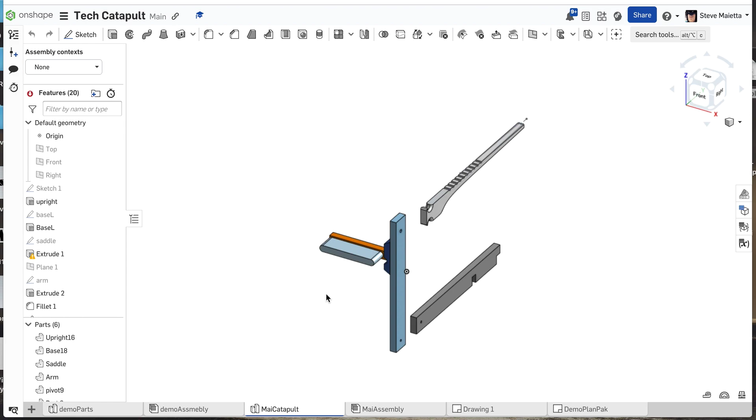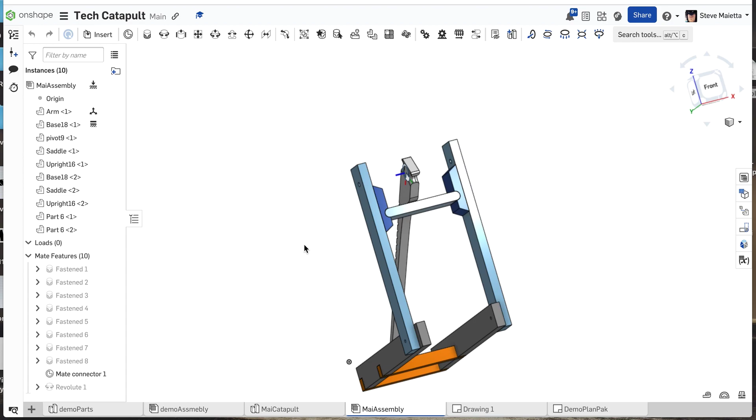Here's my Catapult parts. I've got some interesting looking parts here, but they're all simple parts. I've got my assembly built here, assembled, so I can see that everything fits correctly, and I am quite happy with that. Now I need to create a set of plans so we can build this catapult.

Remember, that happens in what's known as a drawing. So if I click on my drawing, I'm going to show you what I've got here. I've got the first page of my drawings, the assembly: front view, side view, top view, isometric view.

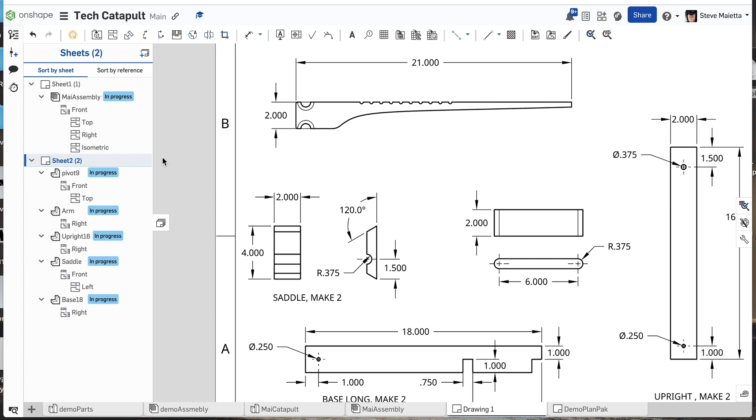I need another sheet to hold the parts, so I'm going to open my sheets menu here, and show you that sheet. That's sheet number 2. Double click, here's the other sheet. This sheet shows you how to make all the separate parts.

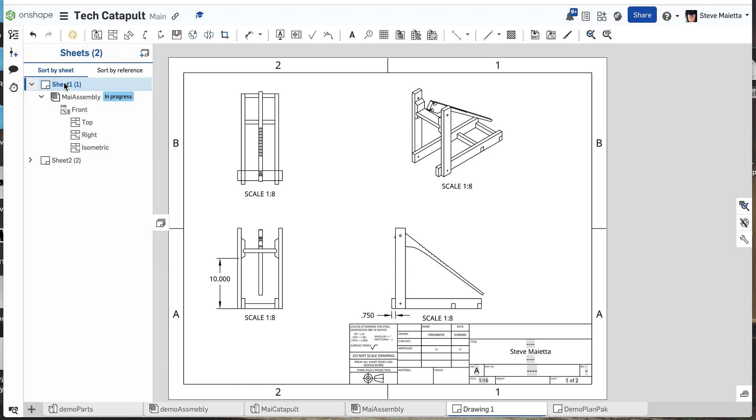Saddle, make 2. Upright, make 2. Dimensions are given here. Base long, make 2, etc. So that's sheet 2, and sheet 1 is my isometric, and it shows how to assemble the parts.

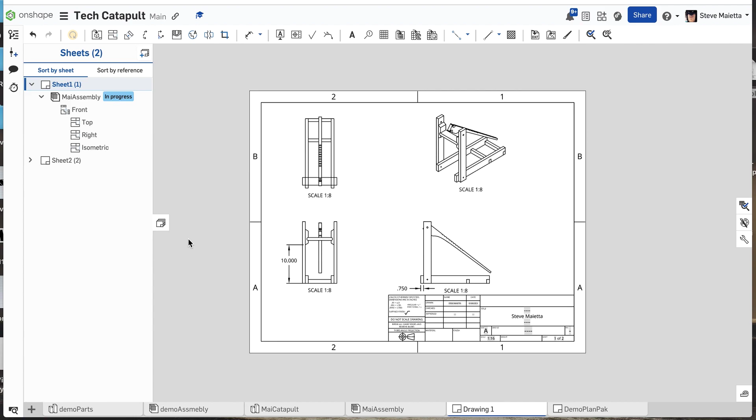This upright is 3/4 of an inch from the front, and these saddle pieces are 10 inches from the base, etc. So let's make a set of drawings like this so we can get it perfect.

All right, plus create drawing. We're going to choose ANSI A, that prints out really well. No views. We're going to start with our first page, which is our assembly view.

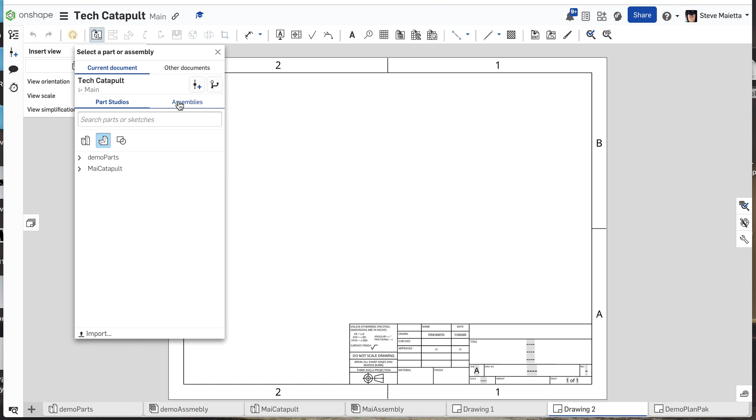We're going to insert the assembly, and then we're going to make all the views appear. OnShape automatically opens up the insert option here. I'm going to go to assemblies, and I'm going to insert my assembly. Now it's sitting here.

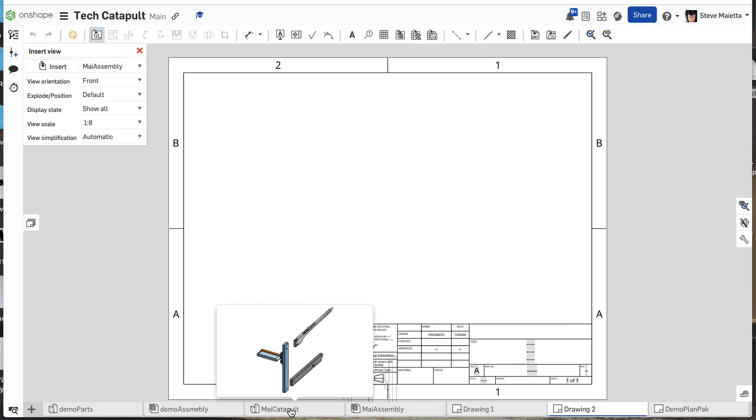I'm not sure if this is the front view or not. It says front. What front here means is, over in your part studio or assembly that you're in the front view. So if you built it on the top, you might have to change it here. At this point, you need to choose the view that gives the user the front view. The end user of your plans will not have all these files.

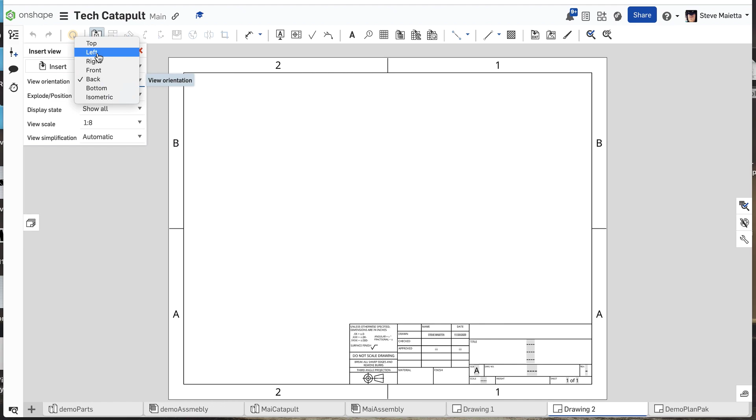I'm pretty sure I did it in a logical way, so front view always goes bottom left. I'm going to click it. Now OnShape automatically switches to the next tool, which allows you to project views onto the side, up to isometric, and over to the top view.

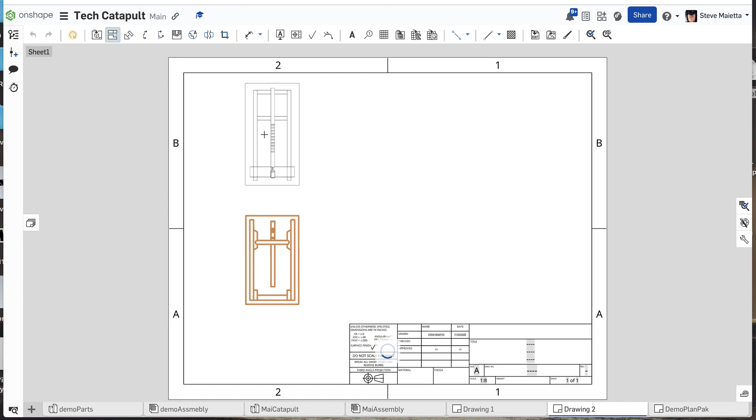Let's drop the top view there, just clicking. I'm going to select my front view again, click it, and paste my side view over here somewhere. Now I'll do the same thing for isometric: click the front view, they should all be based on this front view, and I'll show you why in a second. Click it, and come up to isometric top right.

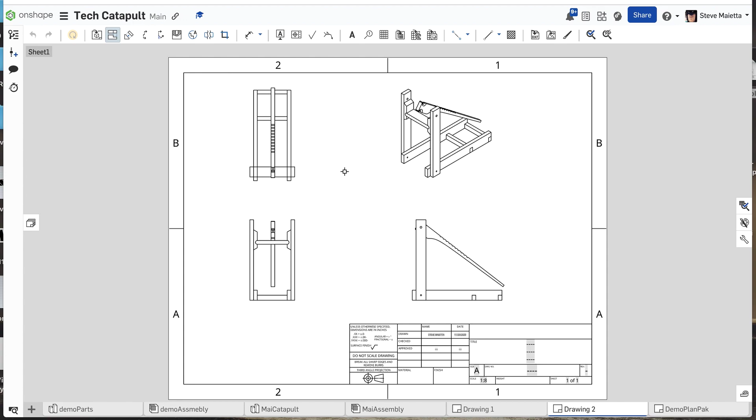Now I'm going to press escape to break off this tool. The reason we should base all our views on the front view is because watch how they stay aligned. When I move the view, they always stay aligned, because aligning the views is very important—it's a standard around the world. So OnShape makes that happen, and we might as well take advantage of its ability to do that.

My views fit well, they're not too big, not cramped, and they're aligned. So that's a good first page, sheet number 1.

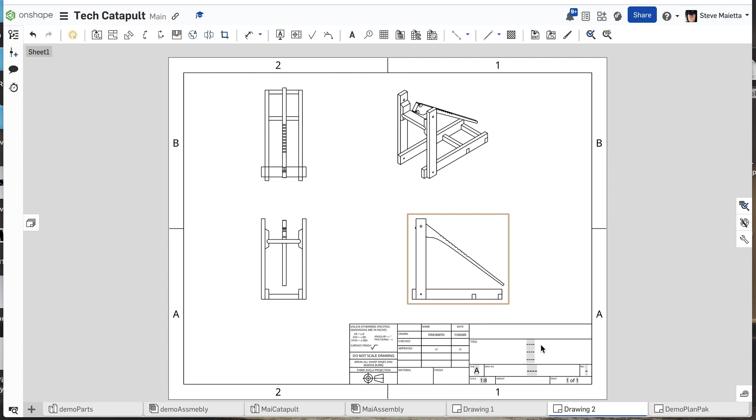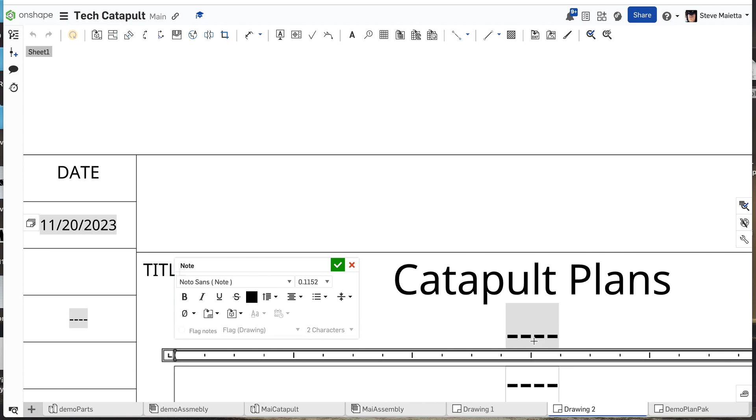In here, I'm going to put my title. Double click on those lines, delete that: Catapult Plans. Next one, middle, we'll put Assembly View, Assembly, and then the bottom one we put our name. Accept that. Now we have our title box filled out.

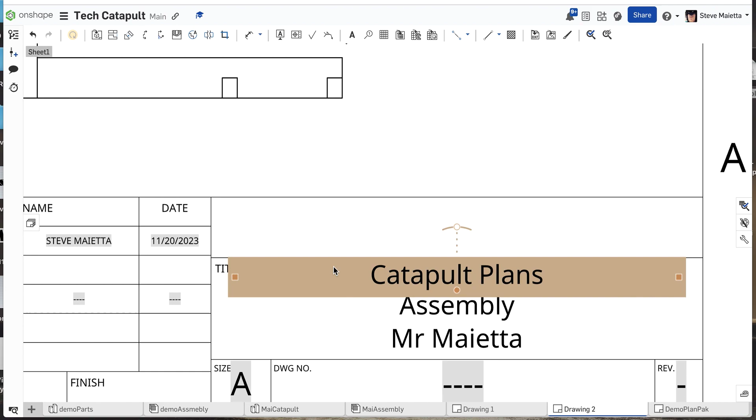So this sheet is almost a good start. We need to add details. Now let's make the next sheet.

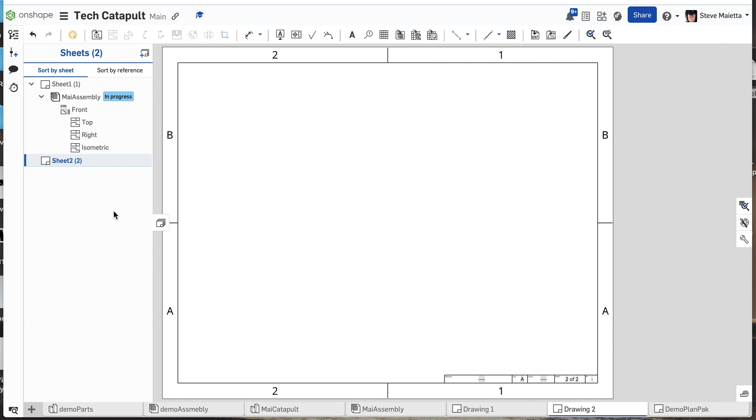Click Sheets, we're going to add another sheet. Notice we're not making another drawing down here, we're adding a sheet to our drawing pack. Now we have a nice open space to add our parts. I'm going to close the menu here and click Insert.

I'm going to go to MaiAssembly, press Insert again. We don't want assemblies anymore, now we want to find the parts. So I'm going to open MaiCatapult, and you're going to see that all the parts are here. Now it's up to you to decide how to organize your parts so they fit nicely.

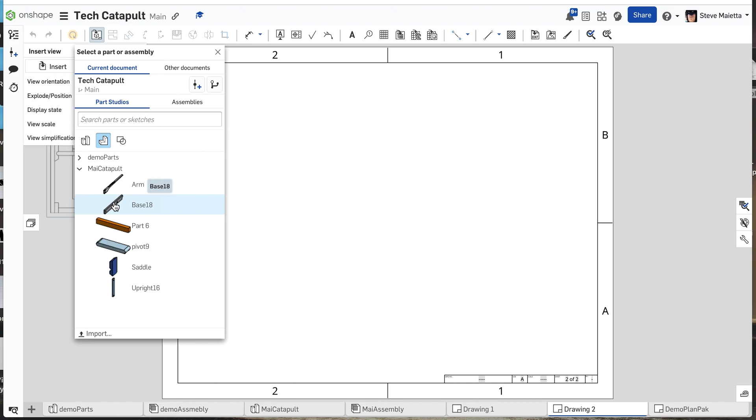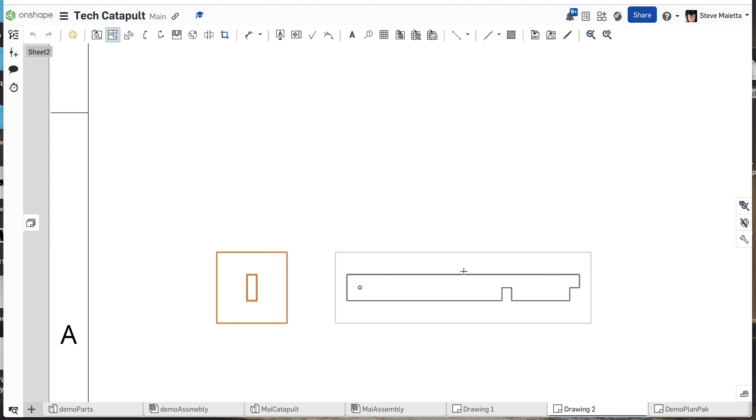Let's start with the largest part, I think it's this Base18. This is a flat part, so all we need is a side view. The front view is not a good view of this part, let me throw that in there real quick. All right, that's not a good view, it doesn't show the details of this part. What we need is a side view, that's the view we want. So I'm going to press Escape, click this view and just press Delete.

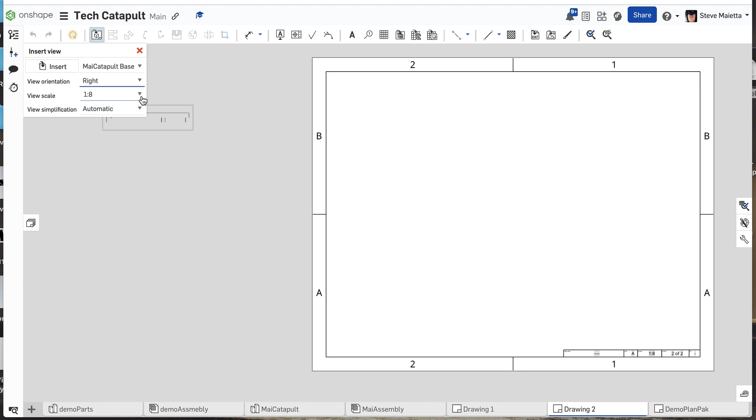Let's try that again. Insert, Insert, MaiCatapult. For me, it's Base18, start with the biggest one. And I want to see it from the right side. There we go, that's a little small. I got a little more space, so I'm going to go 1/8 scale. Let's go maybe 1/4. Would 1/4 fit? That's better, yeah. And I'm going to drop it.

Okay, now I'm going to press Escape. I don't want another view of this, that's the only view I need. Press Escape.

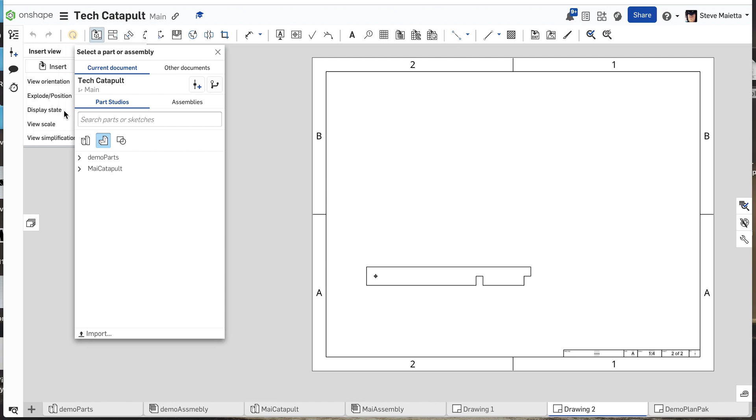Insert another part. Insert, Insert, MaiCatapult. Okay, let's do the arm, another large part. Whoop, I inserted a view there by mistake. Press Escape, I clicked too soon, we don't want that front view. Insert, Insert, MaiCatapult, Arm, Side View.

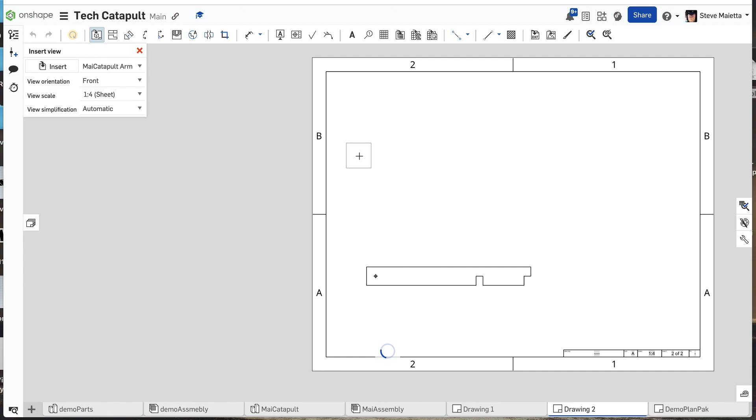That's a large part, put it up here. It's a very interesting part, a lot of details, so we're going to need space to add the information there. Don't need another view. Okay, I'm going to do one more part.

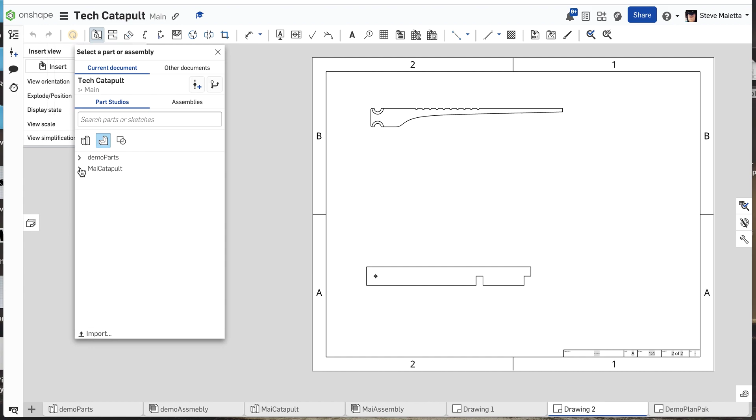I think you're getting the trick here. Insert, let's do the upright. Now the upright is oriented up and down, so we might as well put the upright in an upright position. Once again, right side view, that shows us the holes. Let's put the upright upright, it only makes sense.

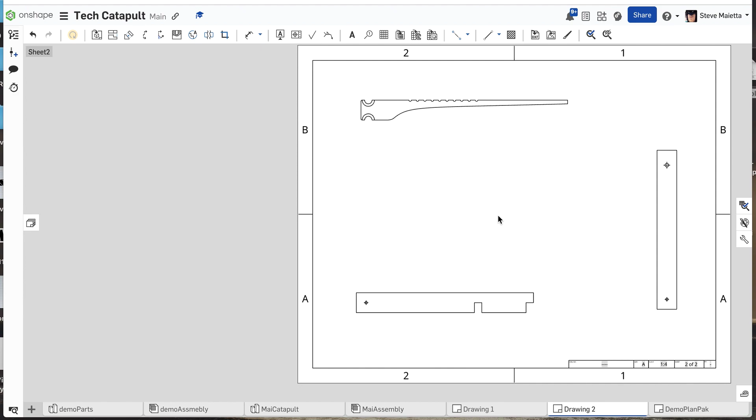The goal of a drawing packet of plans is to be as clear and communicative as possible, so arrange the parts as they would be needed. Okay, now I'm going to add some dimensions so you know how to do that.

The dimension tool is right here, which is D for dimension. There's lots of specific styles of dimensions, diameter is useful for holes. We're just going to click D for dimension, it's the most useful quick one.

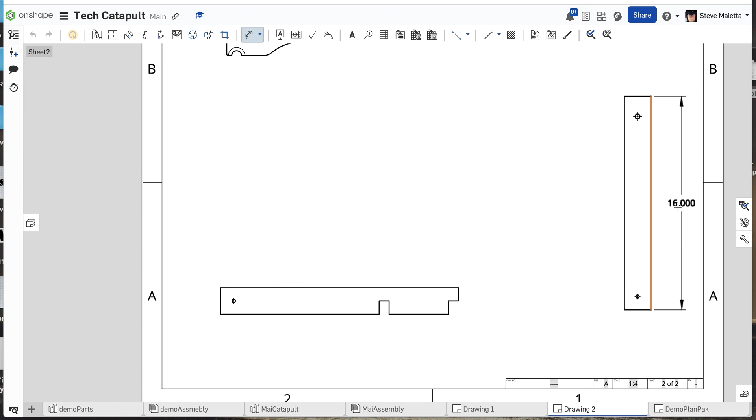So let's go, just like in a part studio, I'm going to click this edge, move out, and I'm going to drop it. There it is, done. I'm going to click this edge, click it, move up, and the 2 fits in there nicely, so I'm going to drop it.

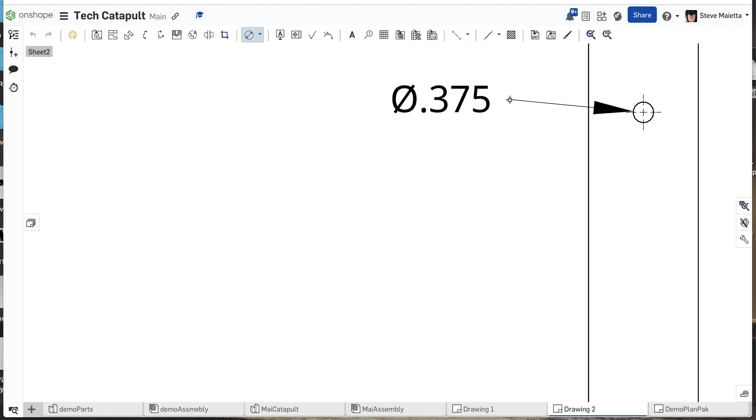Okay, let's pick a dimension for the hole, diameter. I'm going to zoom in and make sure I can, let's put that over here. Nice, and this hole looks to be a different size, so I'm going to click that one. It is a different size for some reason, and I'm going to drop it.

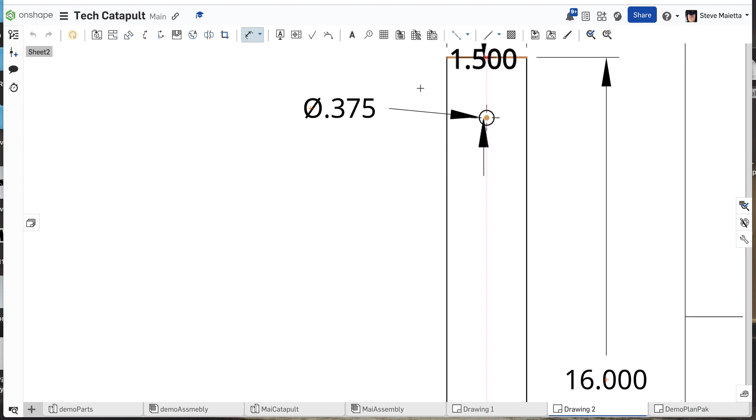Now the holes need a location, so I'm going to D for dimension, just a regular dimension, and we're going to dimension how far from the top this hole is. That's 1.5 inches, so I'm going to put that right there, and I'm going to escape. I'm going to move this one out of the way, you don't want dimensions to overlap if possible. Okay, that looks good, so I'm going to zoom out.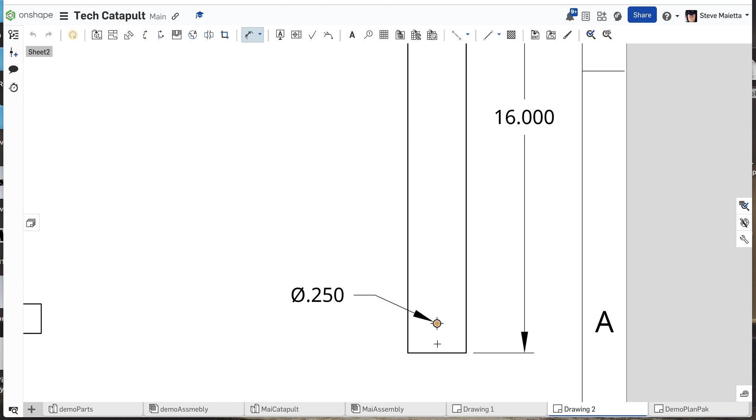I'm going to locate the hole down here as well. So D for dimension, center of the hole to the bottom, that's 1 inch, all right, nice even number. And I'm going to escape and move this out of the way, you don't want dimensions to overlap, it's not as clear. All right, so I started to dimension that part.

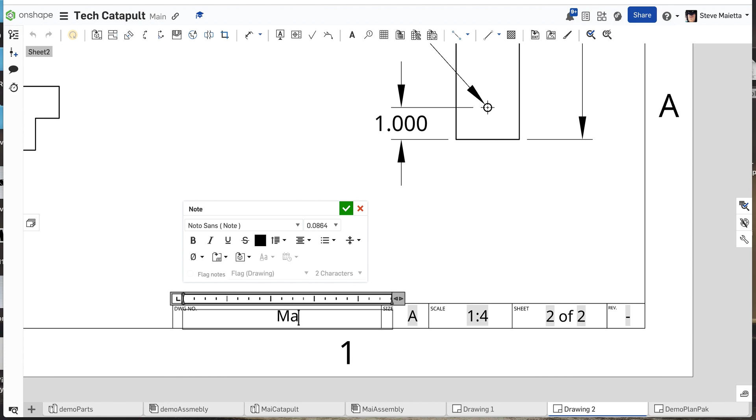Now here we're gonna put a comment. Double click this, no, double click these, there we go. Put Main Parts. Now we know what this sheet is.

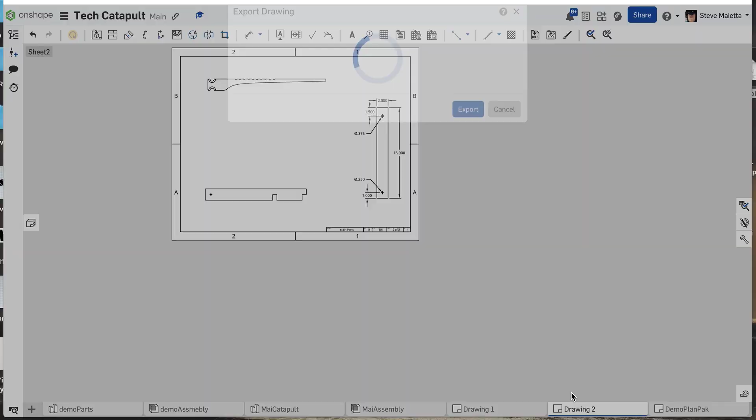So that's how you go to build a project in OnShape, and then you're going to have one drawing with all your information in it. We can then click this and export this as a PDF, and you'll have a nice packet that you can go to the library and print. That's what we're going to use in the workshop, we're not going to use our laptops.

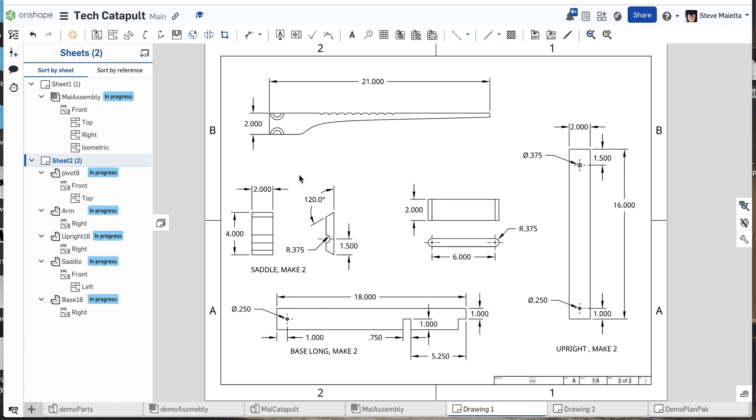This is what it should look like in the end. I'm going to go to my sheet 2 because it has all the dimensions. Every part, so I did this one with you guys already. Every part needs all the details. The arm still needs more information here about these cutouts and these notches.